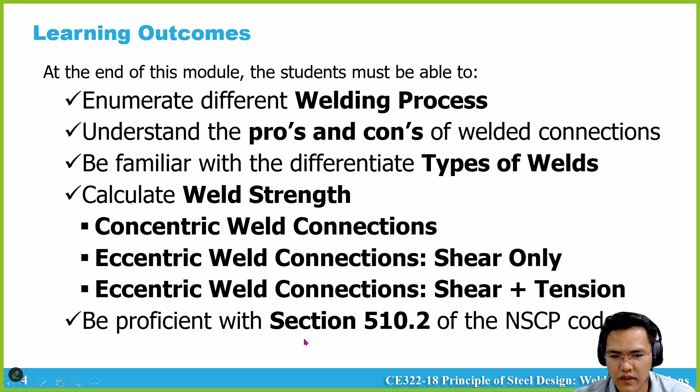So these are the learning outcomes for chapter 8, welded connection. Number 1, enumerate different welding process. Understand the advantages and disadvantages of welded connection. Be familiar with different types of welds. You should be able to calculate weld strength for different configurations, concentric weld connection or eccentric weld connection. And be proficient with section 510.2 of the NSCP code.

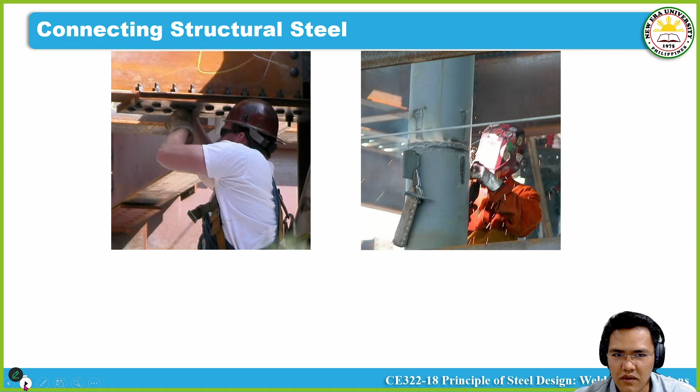Now, in terms of basic application of connection, we were able to discuss bolted connection. So in terms of connecting structural steel, these are the usual methods. We mentioned that in terms of connection methods of structural steel, you have two options: bolting or welding. That's usually common.

In terms of the structure strength, it would depend on what connection method you used. In the actual practice, the connections made at the fabrication shop are called shop connections. On the other hand, connections installed in the field by the steel erector, or iron worker, are called field connections. So straightforward, depending on where you made it, shop or field, that's what you call the connection.

So the assumptions differ depending on which option you pick. There are advantages if it's done in the shop compared to the field. Bolting and welding may be used for both shop connections and field connections. So either way, whichever you use, bolting or welding, it's possible for both shop and field connection.

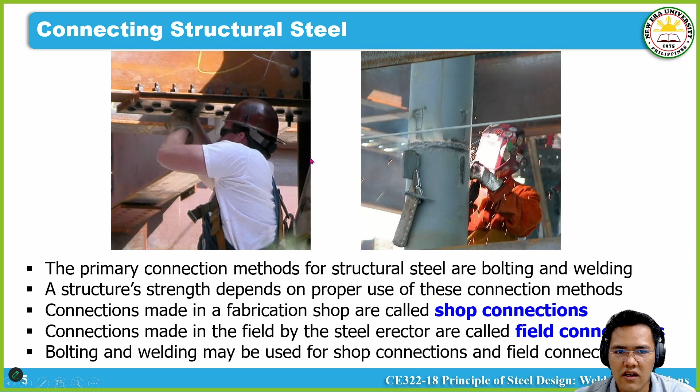So this is an example, I think this one is field connection for bolts. This one is field connection for welds.

Usually the fabrication shops have their own preferred connection method and fabrication method, which varies depending on their skill set. Field connections are typically bolted, because it's easier when you use bolted connections in the field. One reason is you don't need a power supply for welding.

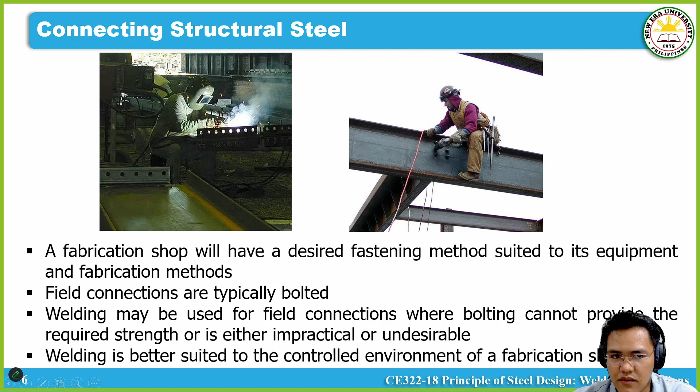Welding may be used for field connections where bolting cannot provide the required strength or is either impractical or undesirable. Welding is also better suited to the controlled environment of a fabrication shop. The environment, especially when it's raining, would affect the welding process. So as much as possible, we want to do welding in the fabrication shop so that all parameters are controlled.

So in terms of type of connection, we already discussed this, the two under NSCP. We're okay with this. We will discuss the welded connection under NSCP 510.2.

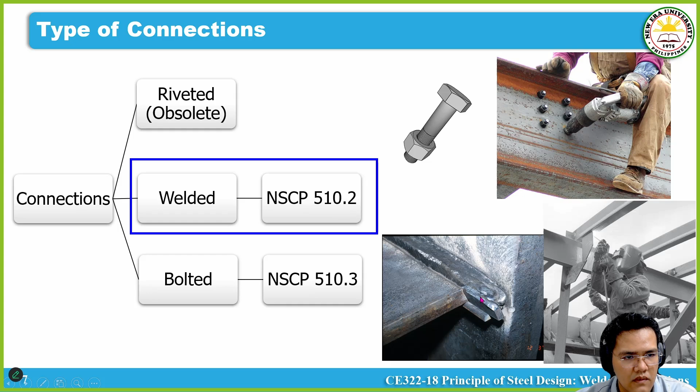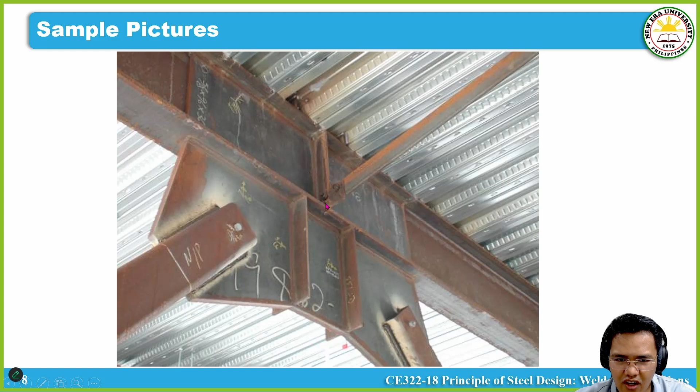So these are examples of welded connections, sample pictures again for welded connection. You can see here we have joints. I think this one is a girder or a beam, and then we have braces, bracing. You can see there are plates. Most, if not all of them, were using welded connections.

Similar to the previous presentation, we have a hollow structural steel section, and the plate is welded to it. So this one here too, for the stiffener.

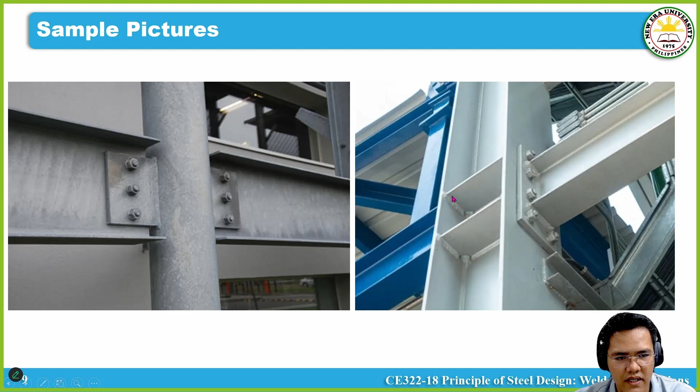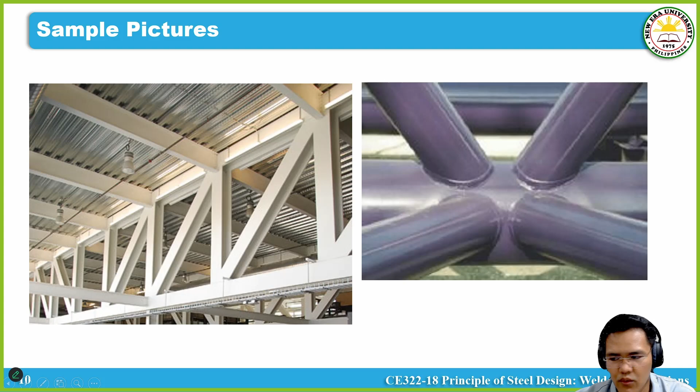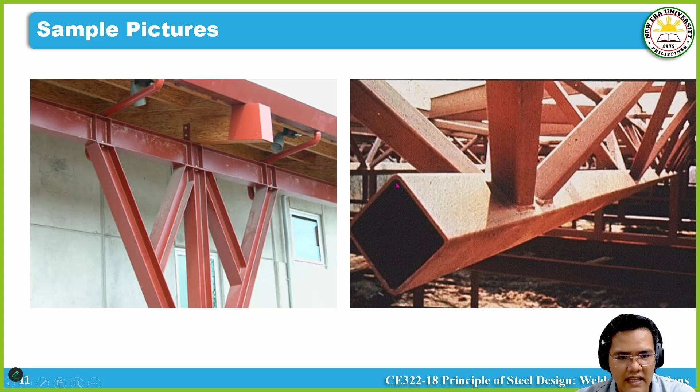These are hangers, for the space frame, rectangular or square hollow section, welded. This one, column to girder connection, you could see on this one it's welded.

It has a plate, most likely on the other side of the web of the girder there's also one, connections like so, welded.

And then at the top there's also a plate, even on the bottom flange of the girder. This one, I'm guessing this is a girder lying down, and at the very bottom part of the girder, you put something like a corbel, like so.

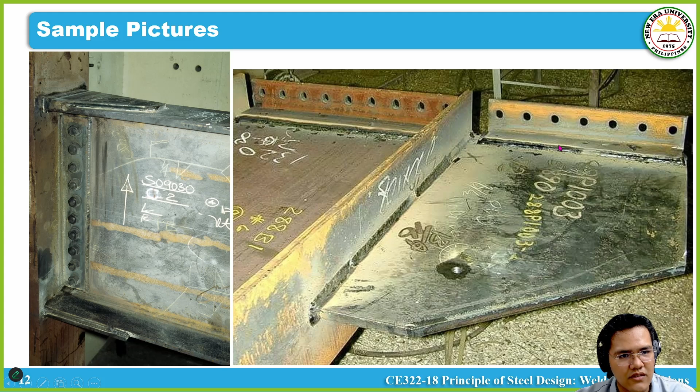Advantages and disadvantages of welded connections. With welded connections, you're adaptable in terms of whatever connections can be used, aside from bolted connection. Usually, full design strength of a member can be more easily developed using an all-around weld. And you would use less material and space with welded connections.

With bolted connections, usually we have lapping plates used, and so many bolts. So, neat appearance, nicer to look at, and cleaner looking with welded connections. More rigid compared to riveted and bolted connections.

In terms of disadvantages, it would require skilled manpower. The welders, as I mentioned, usually have training, and usually they have a certification to be an official welder.

So in return, the rate in terms of labor is higher for the welder. Welding in the field may be difficult due to location or environment. Weld joints are highly prone to cracking under fatigue loading, large residual stress, and bending develop in welded connections. This welded residual stress usually happens when you introduce heat. It often requires more time to construct than equivalent bolted connections.

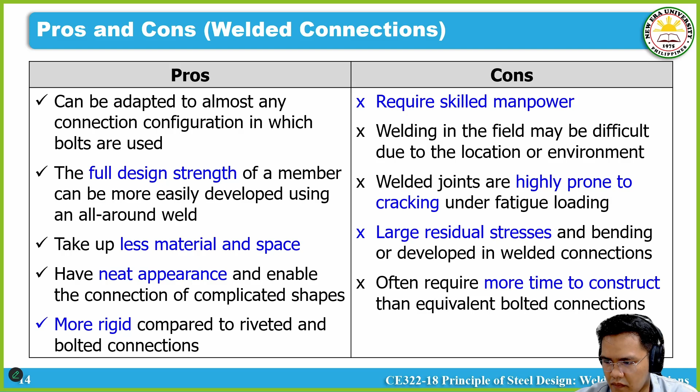So these are some examples of the advantages and disadvantages of welded connections. So you just choose which weapon, or should we say poison, you will use - bolted or welded connections.

Okay, so let's go further on welded connections. Let's define first what structural welding means. There are different types of welding, like automotive welding for vehicles, electrical circuits welding for our circuits or wiring - that's also a type of welding. But we're specifically interested in structural welding. So what does this mean?

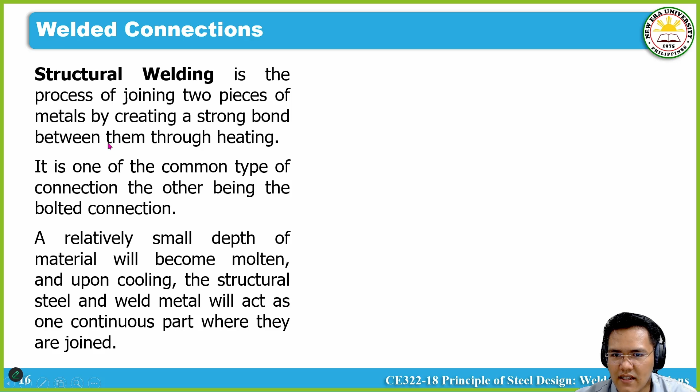Structural welding is a process of joining two pieces of metal by creating a strong bond between them through heating. So here's our figure - we have two metals, this is one, number 1 and number 2 metal.

This is one of the common types of connection, the other being the bolted connection. A relatively small depth of material will become molten, and upon cooling, the structural steel and weld metal will act as a continuous part where they are joined. So what happens here is you have what's called the base metal - the base metal refers to the elements or plates you connect, so it corresponds to the plates.

And then you also have what's called the filler metal, which corresponds to the weld - that's our weld here. So during welding, the weld would solidify, the part of our base metal in contact, and then it fuses as one. So maybe it would be better to watch this video on YouTube to understand further the process of structural welding.

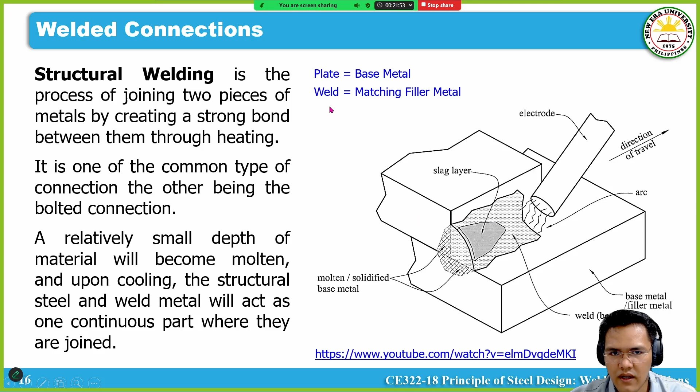It was mentioned that we have what's called an electrode - this is the stick connected to the machine. During welding, it releases an arc, and then fuses as one. During the process, you have what's called slag, and it also produces shielding gas to protect our weld against impurities in the air. After the welding, you get slag, which is what they remove - like black impurities. So depending on how deep or how large the dimension of your weld should be, that will dictate the speed and direction of travel of your weld. So basically that's what's called structural welding.

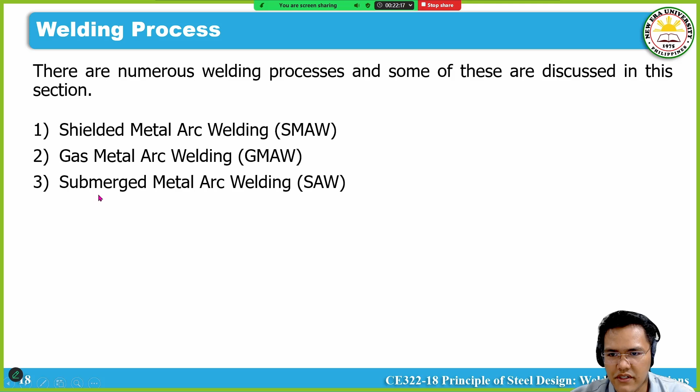Welding processes - these are the three mentioned in the code: shielded metal arc welding, which is the process we just watched, gas metal arc welding, and submerged arc welding. So these are the common three. Actually there are many more as mentioned, so let's break it down further.

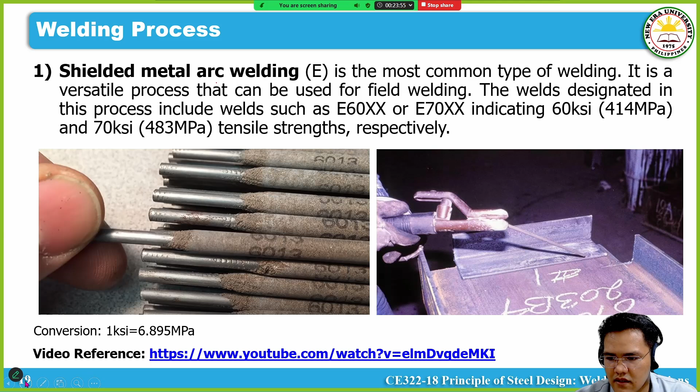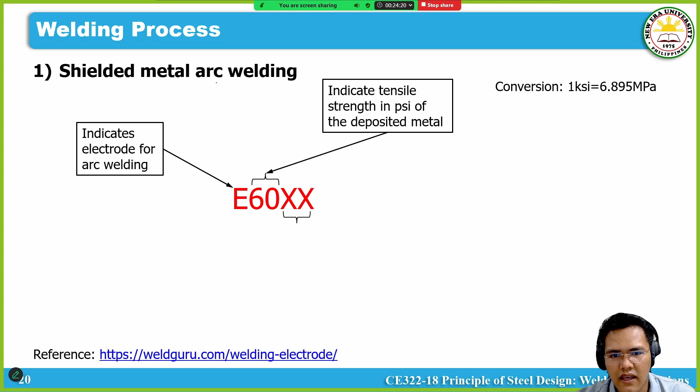Okay, in terms of the electrode identification meaning, meron tayong system dito. So yung una, yung E indicates electrode for arc welding. Next yung first and second digit, ang ibig sabihin niyan is tensile strength in PSI, nabanggit ko na. And yung third and fourth, usually it indicates yung position ng weld mo kung paano mo siya in-install.

O what do I mean by that? Well, during process ng welding, depende sa position ng stick, pwedeng naka-lay flat yung plates mo, pwedeng pa-vertical yung position, pwedeng horizontal like so, or pwedeng overhead. So meron din pala siyang designation in terms of the position.

Okay, so ito yung mga ibig sabihin. 0, walang classification. 1, for all positions. 2, flat and horizontal positions only, so on and so forth. So you could further check itong website na to, which is very good in terms of welding information.

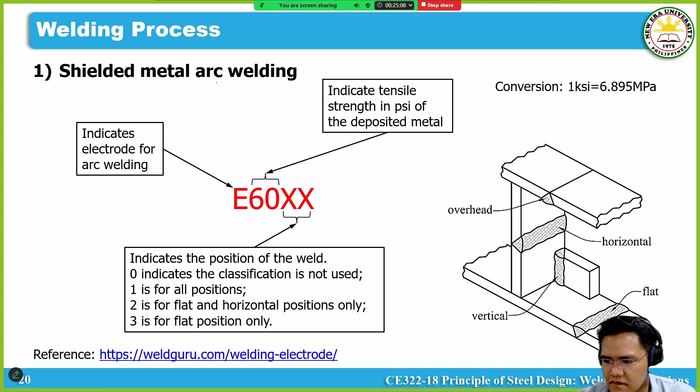Next is yung gas welding or gas metal arc welding, abbreviated as GMAW. So this one is simple and inexpensive process. Basically parang ano lang 'to, para ka naghihinang, parang gano'n yung nangyayari. Usually ginagamit siya for repair and maintenance work lang.

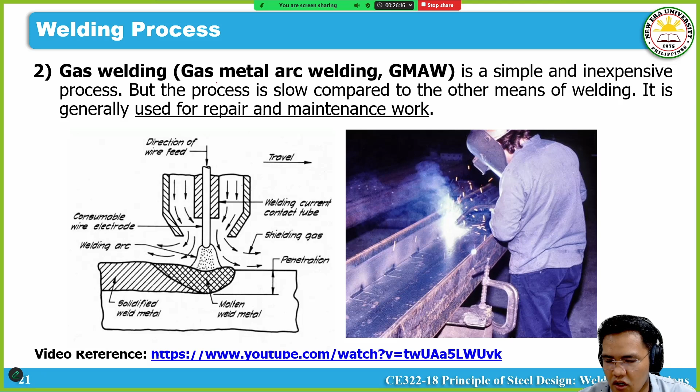Meron kang, sana I would let you check itong video na 'to. Parang ano 'to, yung ginagamit dito hindi stick electrode. Ang ginagamit dito, meron kang parang wire, meron kang wire feed na somehow yun yung ginagamit as filler metal, to join yung ating base metal. Ang ibang term natin dito consumables, kasi nauubos yung pinaka filler metal natin. Parang ano to, yung panghinang sa mga circuit, parang ganun yung example niya. Gumagamit tayo ng wire as our electrode.

Next yung number 3, which is the submerged metal arc welding. As per NSCP, ito yung pinaka superior in terms of the type of welding process. Usually ginagawa to on fabrication plant, which meant to say nasa controlled environment ka and maganda yung pagkakagawa ng welding mo. So I would let you please watch again this link to understand more the concept of submerged metal arc welding.

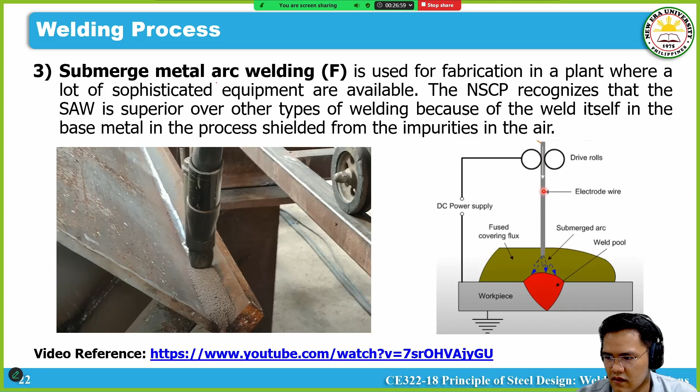So let's proceed on types of joints. Ito yung mga usual na types of structural joints, depende sa position ng connected material relative to another material. So we have the butt joint - pag sinabing butt joint, magka-in plane yung dalawang base metal na kinonect. Lap joint as shown, T, edge, and corner. So yung lap, T, and butt joint, yun yung common na joint on our connections.

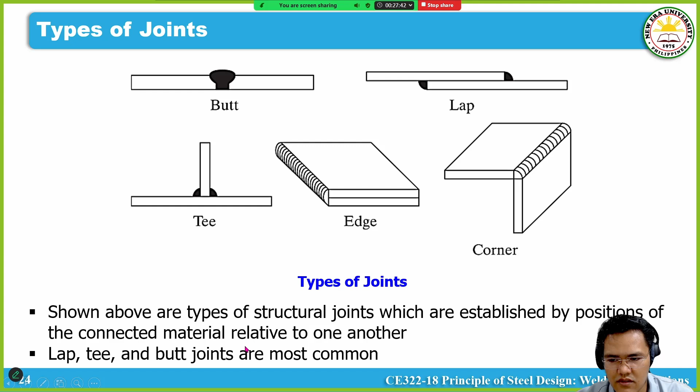Types of weld naman. In terms of type of welds, as per NSCP, ito yung common na tatlo. Yung number 1, which is the fillet welds - ganyan ang basa diyan. Siya yung pinaka-common na type of welds. Yung groove or butt welds.

Teka muna, yung fillet welds, ito yung itsura niya. Yung groove or butt welds, ito yon. Yung plug and slot welds na tinatawag, ito yon. Yung sa plug muna, basically ano lang yon, circular in shape. Ang ginawa mo, binutasan mo yung isang plate, tapos naka-weld siya dun sa plate na to. Slot weld naman, from the term itself, slot, so medyo elongated yung hole mo dito.

Just to clarify lang, we would not discuss or have an example calculation for type of welds 2 and 3, for groove and plug. I would let you do the reading kasi hindi naman siya usually lumalabas sa board exam. Usually ang talagang suki sa board exam itong fillet welds. So to minimize our discussion, you would focus mainly on fillet welds. But obviously, there's some information na ibibigay ko for groove and plug welds.

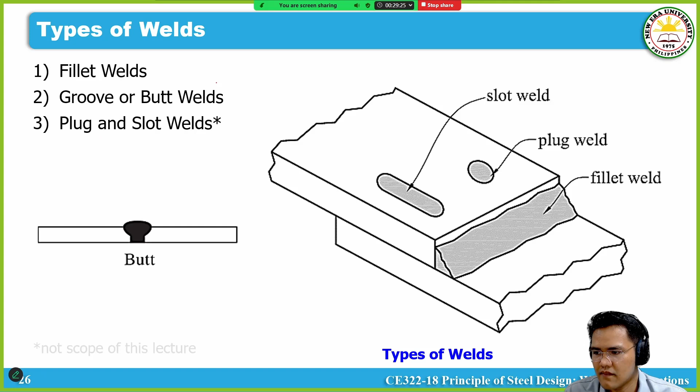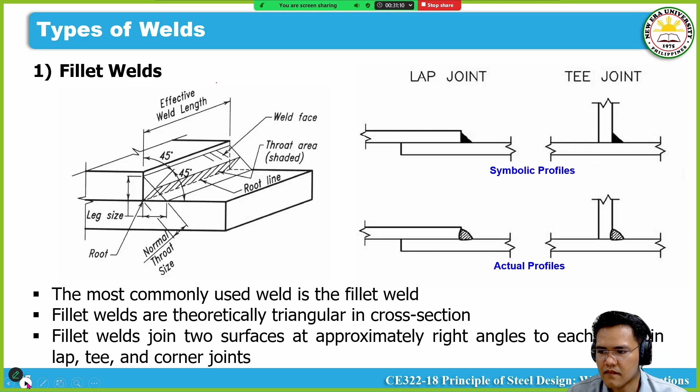Now, in terms of fillet welds, let's detail the schematics of fillet welds. So we have what's called the root, which is the point where the faces of the metallic members meet. So basically that's just this point.

And then we also have what's called the theoretical throat, or the other term for that is effective throat, T sub E. The effective throat is the shortest distance from the root to the hypotenuse of the triangle. So we mentioned this is the root.

And if this is the leg of your triangle, and this is also a leg, then this distance here is the hypotenuse of our triangle. So the theoretical throat or T sub E is from the root to the shortest distance. And that shortest distance should be 90 degrees with that line so it becomes the shortest distance. So this line is what's called the effective throat, this distance.

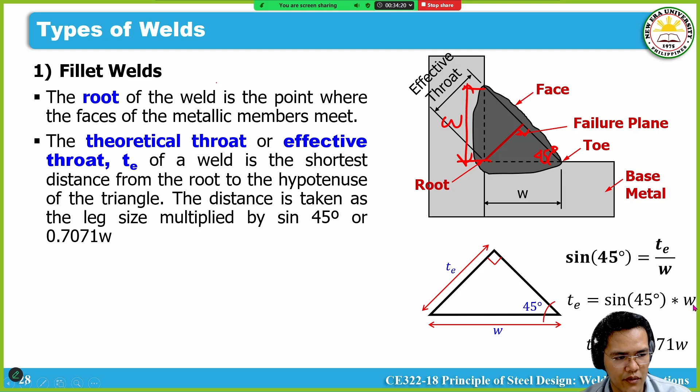Now, sine 45 degrees is also equal to 0.7071, so this is the equivalent for our T sub E. Now, this scenario, for the formula of the theoretical throat or effective throat, is the scenario where we assume equal legs, meaning the size of our legs is equal. There are cases though where the legs are unequal.

For example, if this side is W and this side is H, and they are not equal, then in that scenario the code says to use a different formula to calculate the effective throat. Now, in terms of the board exam, usually it's only the equal leg case that comes up, and most likely that's the only one you'll use in calculations. So I just want to emphasize that this is what we'll use for fillet welds.

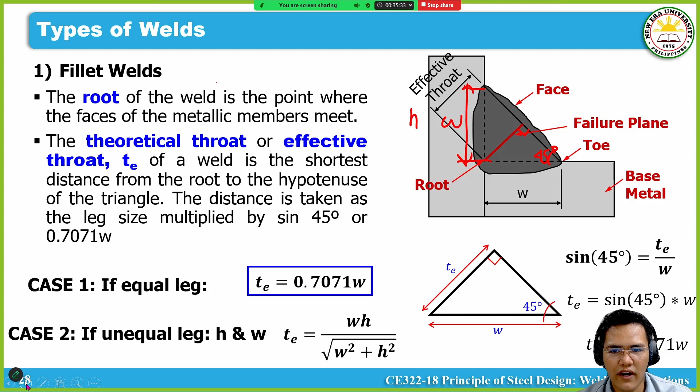Okay, we're done with theoretical throat. Let's discuss further what's called the throat area, because the question is, for fillet welds, what resists the applied load on the base metal in terms of the weld? Well, that's the throat area.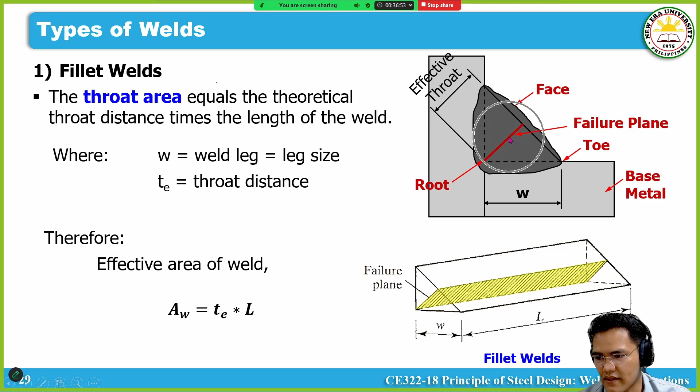So let's proceed to the next type of welds, which is the groove or butt welds. From the discussion earlier, when the fillet weld is not appropriate on a certain connection, groove welds are used. For example, if you need the two plates in one plane, that should be groove or butt welds. So basically that's what characterizes the groove weld - they are in a similar plane, same plane, like so. There are different namings depending on the shape of the plate or the groove weld.

So this one is called bevel, this one is groove or square - okay, square. And this one is double V. So this is the profile before welding, when it's just plate. Then after welding, this becomes the joint base metal.

Usually and obviously, the groove weld has higher strength in comparison with the fillet welds.

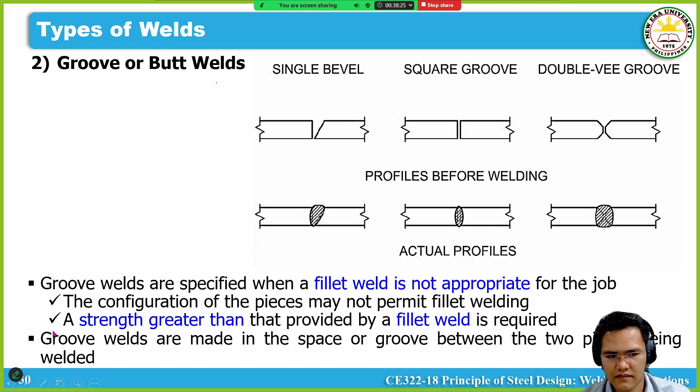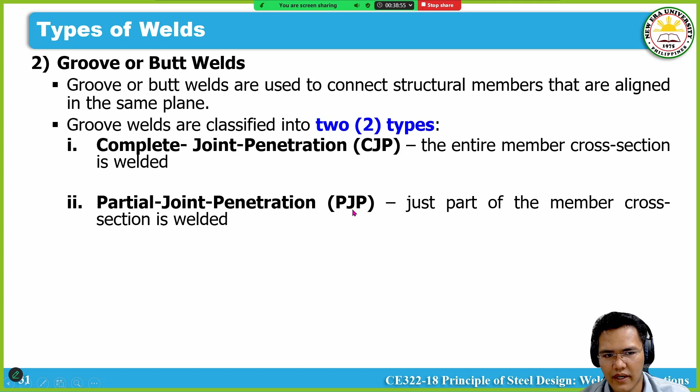In terms of groove welds, we have two classifications. Number one is what we call complete joint penetration, abbreviated as CJP. Another term used in books is full penetration - the entire member cross-section is welded. The second is partial joint penetration, abbreviated as PJP, wherein just part of the member cross-section is welded.

Now, to give you an idea, this is an example of CJP. We have different namings depending on the shape - I think this one is square, we have V, and we have bevel and J groove.

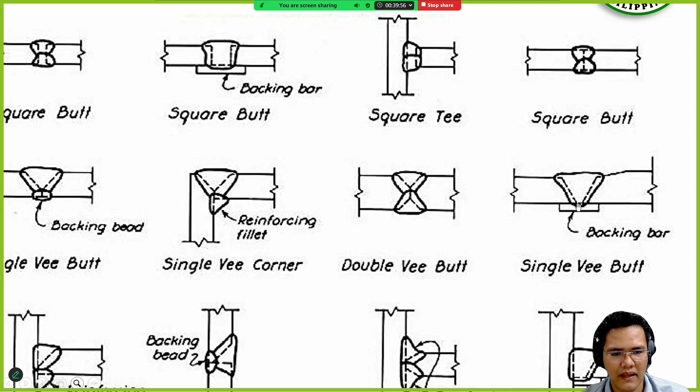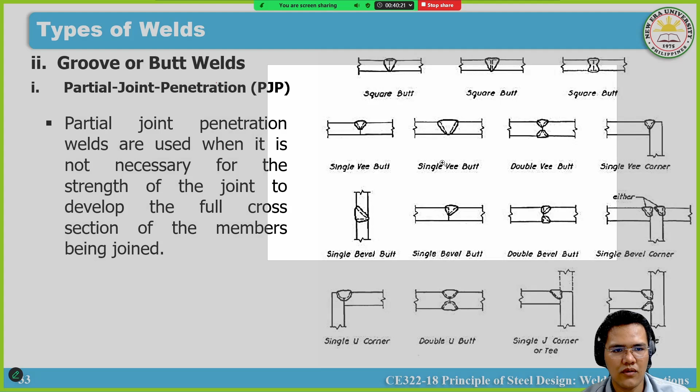In terms of the partial joint penetration for groove welds, these are our sample shapes and namings - square, single V. So you could see that not all of the member cross-section is connected, just partial - that's the basis of the name. Only partial is connected.

Lastly, the plug and slot welds. I think you already know this - in shear too is the transmission of its connection. So that's it, plug and slot weld.

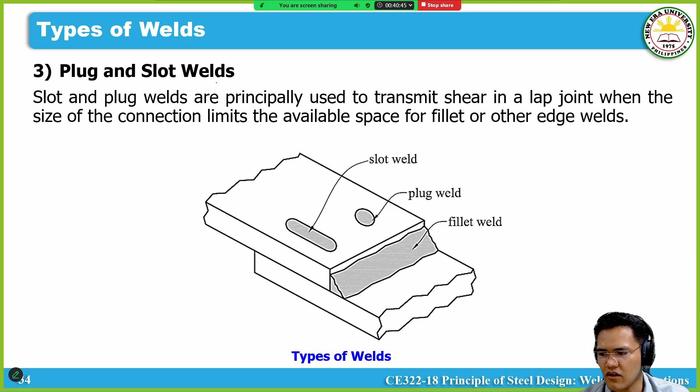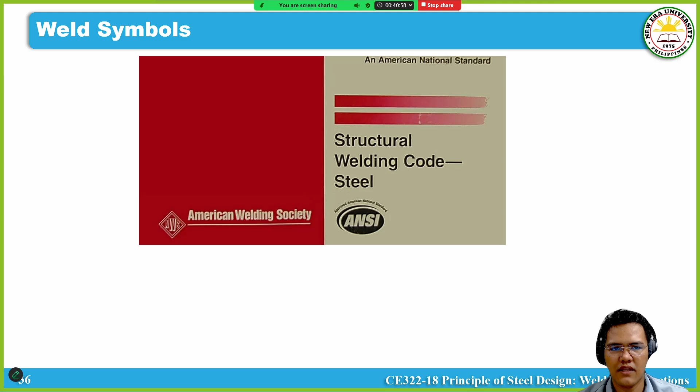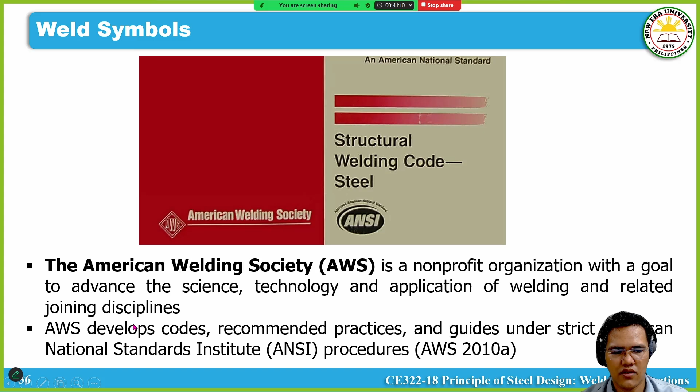Let's proceed to weld symbols. In terms of weld symbols and some of the governing codes, this is what we call the American Welding Society or AWS - a non-profit organization. Usually they have codes for welding, which is also adopted by NSCP 2015.

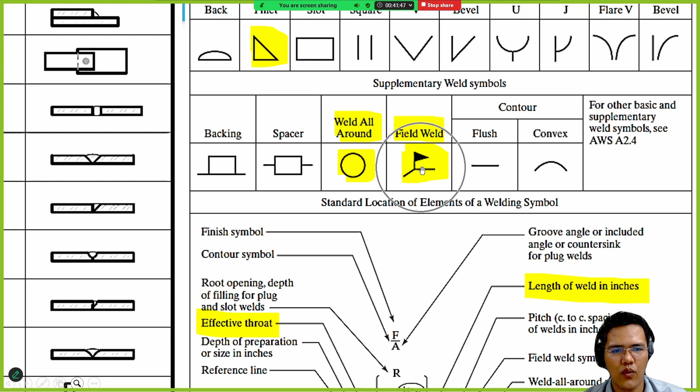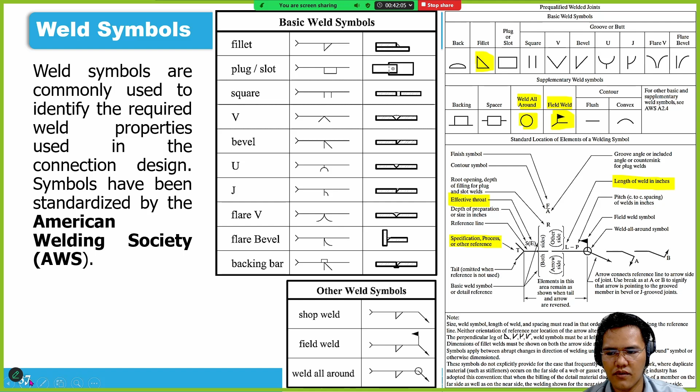Yeah, the meaning of the basic weld symbols, here it is. You need this especially when you're at the site and given a plan to construct. For example, if you're the welder, you should understand what's specified in the plan. So you should already know now how to read this, to understand how to communicate from the designer or engineer to the fabricator or the erector. So this is the fishbone - this is our head or leader line, and this is our tail.

In the body of the fishbone, there's information - these are the contents. Number one, this information pertains to the size of the weld, or the W or the leg - that's the meaning of size of weld in millimeters. This one I got in English units, but anyways, usually it's in millimeters.

This is our basic weld symbol, showing it used fillet welds. And then we have this number which corresponds to number 1, for the length and spacing of your weld. Your weld can be intermittent, like you have a line then it stops then a line again. So the 6 is the spacing of your weld, in millimeters. And this information at the tail usually indicates what electrode you used.

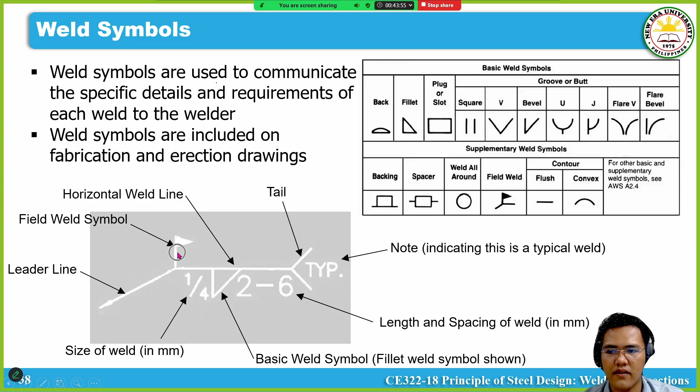And this information would give you an idea if it's a field weld or shop weld, or sometimes if it's weld all around. So I think it's better if we do an example so you can understand better. So for example, we have these weld symbols here.

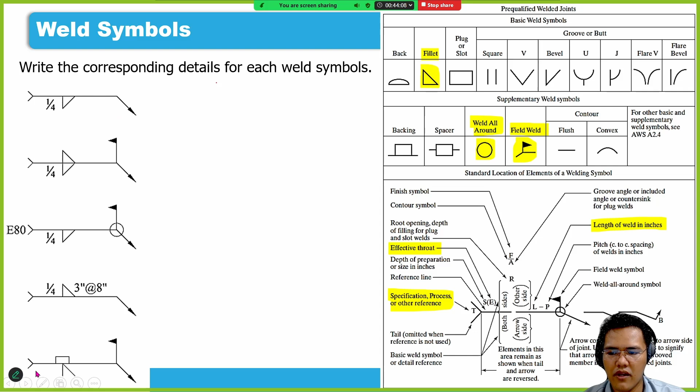Ano ba yung interpretation natin dyan? Halimbawa, for this one, ang sabi gumamit siya ng 1/4 inch na weld size fillet weld kasi triangular. Mapansin mo dito sa part na to ng weld symbol, walang flag. So pag walang flag, matic yon, shop welded, kasi ang contrast nun is may flag, at ang ibig sabihin ng may flag is field welded. So basically kapag walang flag, it's shop welded.

How about yung location ng triangle o yung fillet welds mo? Kasi yung iba dito nasa baba, yung iba nasa taas. Ano ba ibig sabihin nito? Ang ibig sabihin niya is near side. Halimbawa, yung arrow ko nakaturo dito sa weld na to, ang ibig sabihin lang doon, siya yung directly makikita mo. Nasa near side ka kung andito yung observer.

Now if andito yung weld mo sa other side nung connection mo, at dito nakaturo yung leader line mo, mapansin mo yung fillet weld mo nandun sa taas. So ibig sabihin nun, far side siya, nasa kabilang side nung connection mo, pero dito pa din nakaturo, sa joint na to. Yun lang ibig sabihin niya.

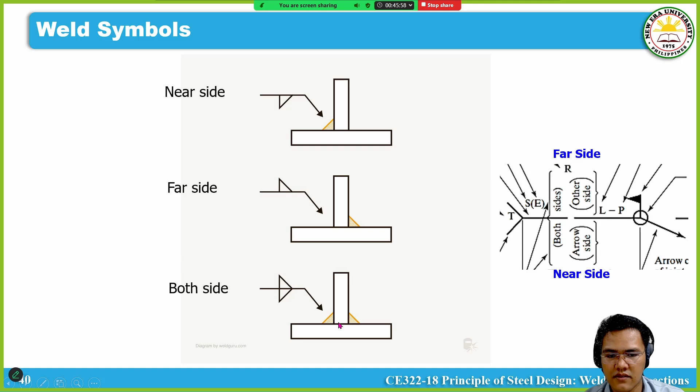At kapag dalawa na, ibig sabihin nun both side nung connection mo, merong fillet weld. Sana malinaw yun.

Okay, so ito malinaw na rin to. Alam na natin yan, it's a 1/4 inch na weld size, fillet weld, field welded, kasi nagkaroon ka na ng flag, on both sides. Similarly, ayan, 1/4 inch fillet weld, field weld all around. So ito, naglagay ka pa ng circle, it means weld all around, using E80 electrodes.

And next, ganun pa din, 1/4 inch fillet weld, shop welded, kasi walang flag dito, on the far side with 3-inch na length ng weld spaced at 8-inch on center.

At ito, ang ibig sabihin naman nito is single bevel weld. Ito, field welded with backing bar. Meron kasing rectangular dito, so ibig sabihin nun, pinapagamit ka ng backing, backing bar.

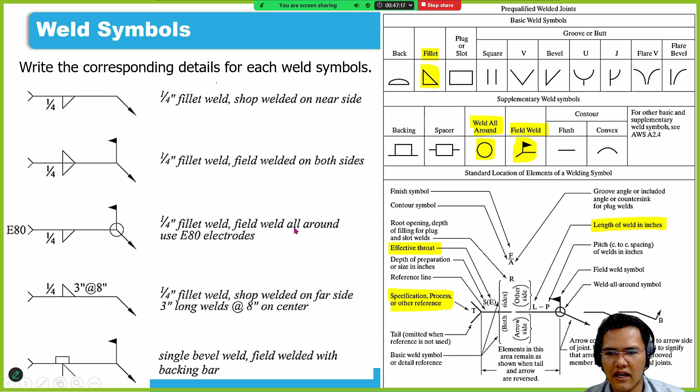Sana na-gets nyo kung paano tayo mag-interpret ng weld symbols. Let's proceed with the weld strength calculation. Paano ba ina-estimate natin ang strength ng isang weld?

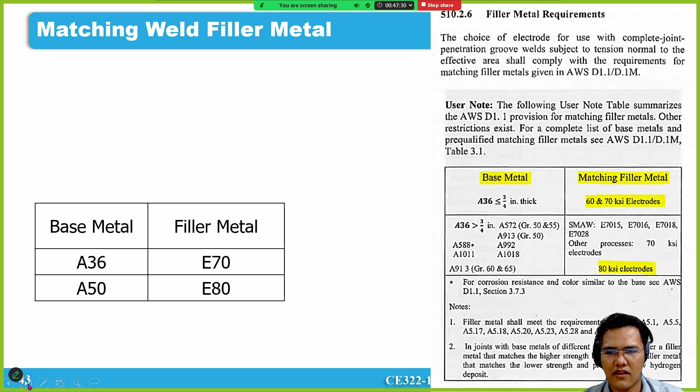Punta muna tayo sa in terms of the rule of thumb, in terms of the matching of weld filler metal. Ang question kasi is paano ba natin na make sure na matibay yung connection natin? Well, yung principle is that the connecting material, yung filler metal, should always be stronger than the base metal. Na-discuss na natin to last chapter. At ang question is paano natin make sure na mas matibay yung filler metal?

Meron binigay si code under section 510.2.6, filler metal requirements, ito yung matching weld filler metal, lumalabas dito on this column. Ito na interpretation: if yung base metal na ginamit mo, gumamit ka ng A36, dapat daw yung filler metal na gagamitin mo o yung weld mo is electrode 70, yan yung minimum. At kung A50 is E80. Ito yung rule ni code para ma-make sure na mas matibay yung filler metal against the base metal na gagamitin.

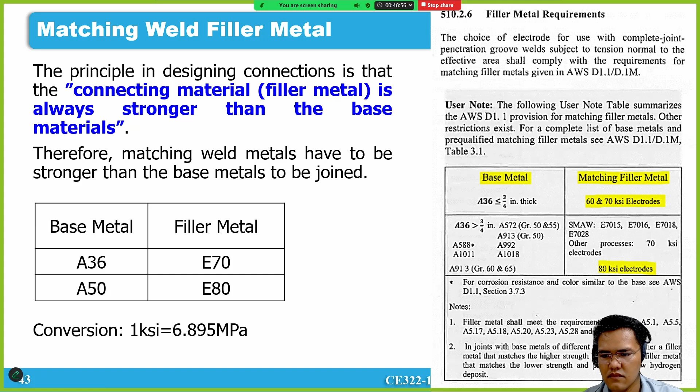Ibig sabihin lang nito, si base metal yung una magpe-fail, hopefully, bago si filler metal. Conversion, I think okay tayo dito.

Now in terms of weld strength, depende kung ano yung action with the weld mo. Pwede kasing loaded yung weld mo in shear, in tension, or in compression. Ang sabi naman ni code, ayan yung mga action, load type and direction, o combination of this action. Meron tayong appropriate formulas for this one at appropriate parameters na dapat natin gamitin. Check natin yan mamaya dun sa pinaka-table natin.

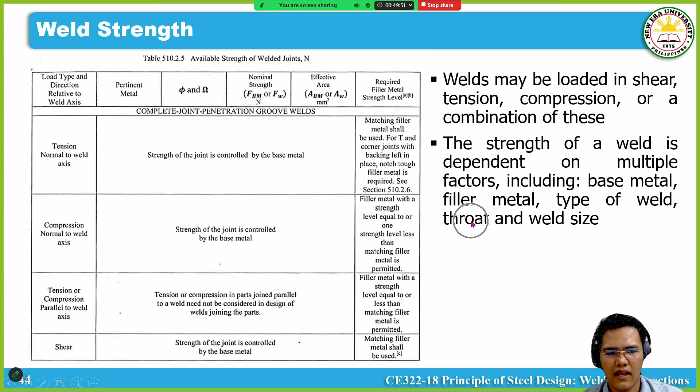So yung pinaka-strength talaga ng weld natin would refer into different factors or multiple factors, usually depending on the base metal, yung filler metal, yung type of weld, yung size ng effective throat, at yung weld size. Yan yung mga factors that would contribute sa pinaka weld strength natin.

I would also like to present itong table na to from the NSCP, ito yung table for available strength of welded joints. Mapapansin nyo, itong first part ng table, ang sabi dito, complete joint penetration o CJP, groove welds. So sabihin pag groove weld ka, lahat ng sa table na to, ito yung gagamitin mo. Meron ka ditong different action or load type, so alamin mo na lang, tapos merong information dito.

Kapag naman partial joint penetration ka, pero groove weld pa din, ito namang table na to yung gagamitin mo. Additionally, if plug or slot weld ka, ito naman, itong row na to ng table yung gagamitin mo. Sana malinaw yun. So anong mapansin nyo, lahat binigay except si fillet weld. Actually, discuss ko na lang mamaya kung saan natin kukunin si fillet welds.

Also, in terms of the weld strength calculation, this is the formula as per the code in terms of strength. The nominal strength, in terms of the weld metal, weld metal strength, is R sub n is equal to F sub W times A sub W.

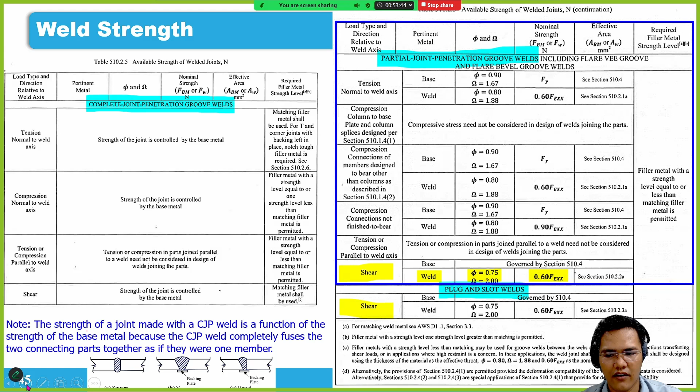So what does this mean? It makes sense that in terms of fillet welds, although it's not directly or explicitly mentioned in the code, since it's shear action, what we should use for F sub W is this 0.6 times F sub EXX. What does this mean? It just means 60% of the tensile strength. This pertains to the electrode, F sub EXX, the electrode of the weld you used. Only 60% of the tensile strength is what you'll use in the formula.

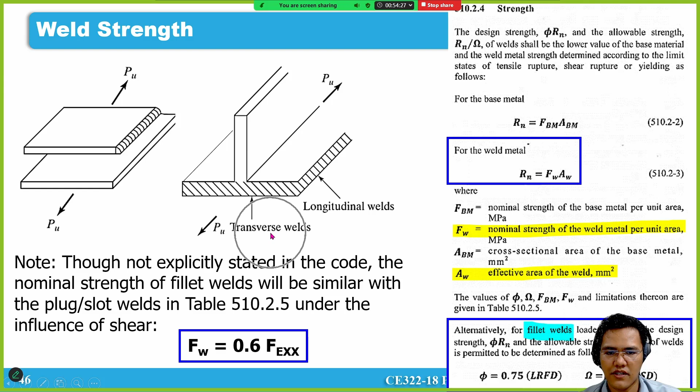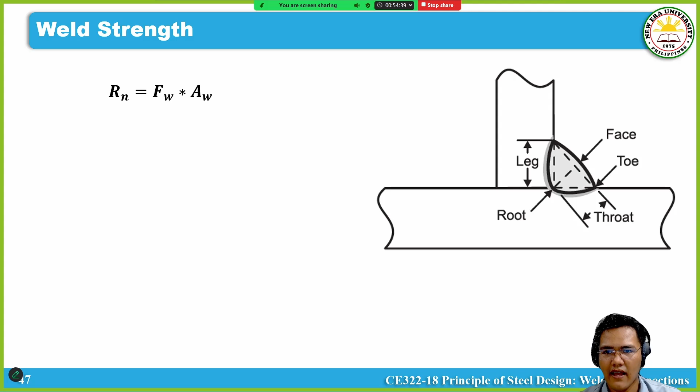So therefore, if we finalize the weld strength calculation formula, we could go back again to the nominal capacity. F sub W, R sub N is equal to F sub W times A sub W, wherein the A sub W or the area of the weld, which we defined, is the effective throat times the thickness, the effective throat or throat thickness times the length of your weld.

And as we said earlier, the effective throat thickness or T sub E is equivalent to 0.7071 W. So we could plug in further - we could say that the area of the weld is 0.7071 WL. From this equation, plug this in and you will have this.

And let's plug in - remember that per the code, only 60% of the tensile strength is used for the design of weld. So from this equation, the nominal would be, first, F sub W, which is this, 0.6 - or this is it. And A sub W, this one. So all in all, this would be our final formula for the nominal strength of fillet welds.

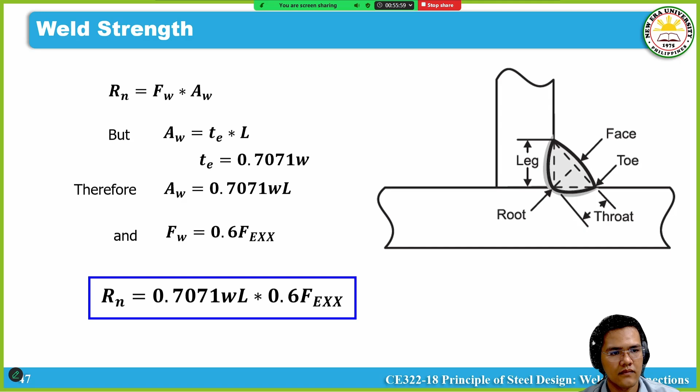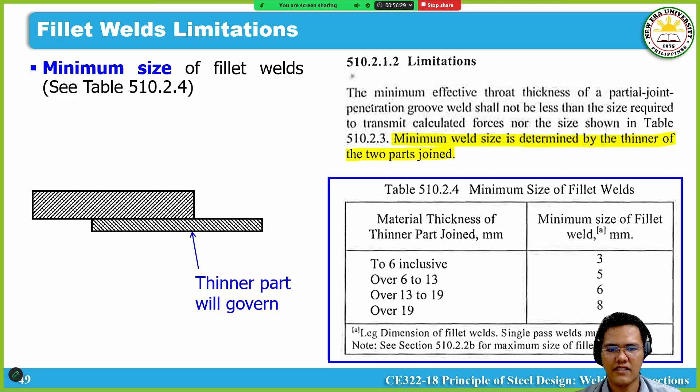So for example, in terms of the minimum size of fillet welds, this is it. But I would suggest we discuss this further once we get to the example problem, so let's skip this for now. We also have maximum size and effective length for the limitation - let's skip that too and proceed to the next item.

So let's have an example problem, and we'll discuss those limitations as we go through it.